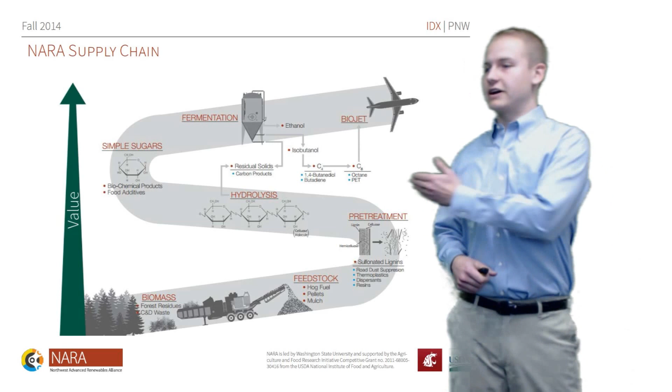However, it's not so easy to just go from biomass to jet fuel. There's this path that we have to take and go along it. And while this may look linear, there's a few different options along the way that the IDX team has been looking at. Right here, we're going to see the different options.

Option one is an integrated biorefinery, where all those processes you just saw on the last slide will be done at one central location. However, the IDX team is also considering a depot facility plan, where the preliminary steps would be done and then the feedstock would be shipped off for conversion to finally be turned into jet fuel. Both of these will be looked at.

To look at both of these, we divided ourselves into two teams. I'm now going to pass it over to my peers to talk a little more about the different teams and the different types of sites we are looking at.

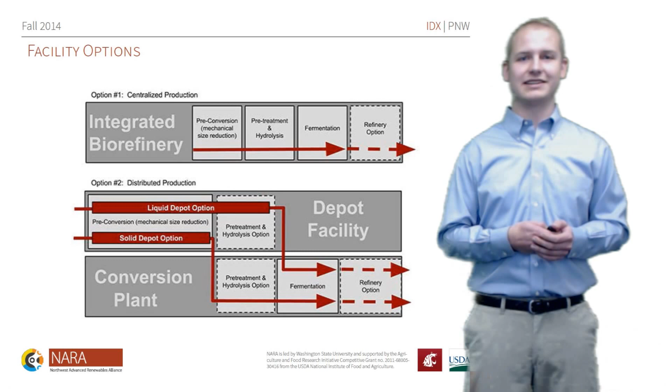Hi, my name is Ian Smith. To start it off, we're going to start with naming the members of the depot team. With that is Matt Jarrett, who just spoke recently, Stephen Keith, Cody Lane, and Ian Smith with myself. We're all students at Washington State University studying civil engineering. Brian Hansen is also on the team; he studies at University of Idaho and is studying bioenergy engineering.

The depot team is part of two facilities, which is the solids depot and the liquids depot. The conversion team covers two different facilities: the conversion facility and the integrated biorefinery. On this team is Sydney Diekman, Kyle Stevens, Christian Williams, and Anna Martin, and they're all students here at Washington State University studying civil engineering as well.

Now here is the depot team analysis. We have two different facilities, the solids depot and the liquid depot, and it focuses on the first half of the supply chain. For the solids depot, it is strictly the mechanical pre-conversion, which is the mechanical reduction in particle size of the biomass. So you have the biomass, and then you change that into the feedstock, which is wood chips or pellets, depending on what process you decide to take.

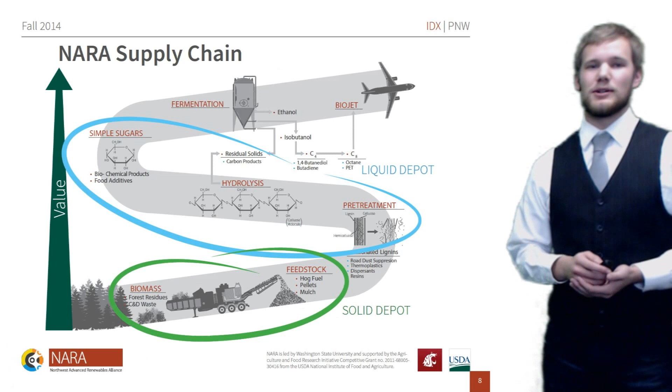The liquids depot takes that one step further: it has the mechanical pre-conversion, and then the liquid pretreatment, which is the mild bisulfite. This gets it ready for enzymatic hydrolysis, which then takes the sugars out of the biomass and sends that on to the conversion facility. There's a couple of things that make the depot methodology a little bit different.

The depot is multiple facilities of the same type, all smaller in scale. NARA has done an analysis taking an intake of 770,000 bone-dry tons a year and converting that into biojet fuel. A solids depot methodology would consist of 3 or 4 solids depots close to the biomass residuals, all working at a processing rate of 250,000 bone-dry tons per year.

And this cuts down costs on transportation of that biomass. If you have to transport that biomass far away and then mechanically reduce the size, then that cost of transportation is rather high.

The liquids depot is fairly similar, but there will only be about 2 of them working at a higher rate than a solids depot. This is because the increase in infrastructure due to the pretreatment and the enzymatic hydrolysis. So there'll be increased storage and increased type of equipment, such as a bioreactor or a reactor for the pretreatment.

And so I'm going to pass this on to the conversion methodology, and that'll be Anna Martin introducing that.

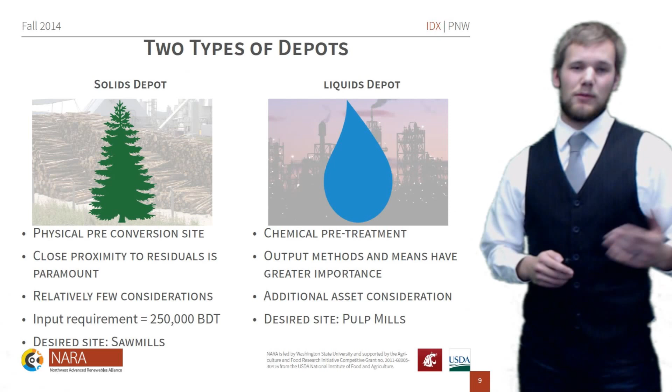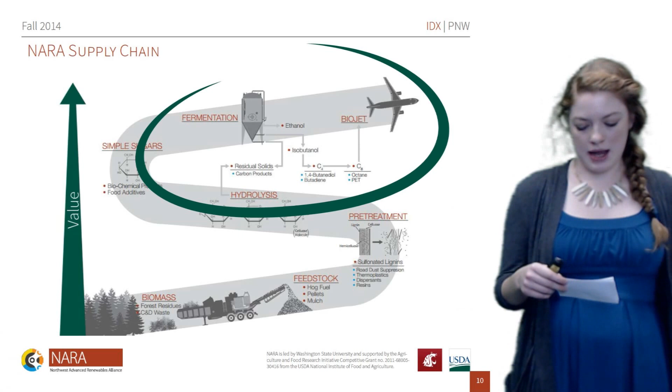Okay, so this is the NARA supply chain once again. It starts off for the conversion process by receiving the simple sugars and fermenting them to create the isobutanol. This isobutanol is then refined into kerosene. The kerosene is then blended with petroleum to create the final product of jet fuel.

So there's 2 types of facilities that the conversion process looked at. The first one, the conversion facility, will change based on what kind of depot is selected in the first part of the process. If a liquids depot is chosen, it will include fermenting and refining. If a solids depot is chosen, it will also add in an extra element of hydrolysis.

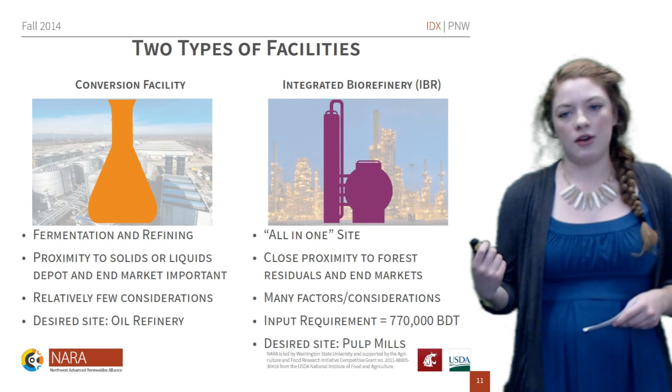The most important part for the conversion facility is that you have close proximity to the solids or liquids depot and to the end market. Relatively few considerations were put into selecting a conversion facility compared to an integrated biorefinery or some of our other sites that we looked at. The most desired factor in a conversion facility site ended up being an oil refinery.

The next type of site we looked at was the integrated biorefinery, and this was kind of an all-in-one site. So it takes the woody biomass all the way to biojet fuel. The most important factor for this ended up being close proximity to forest residuals and the end market.

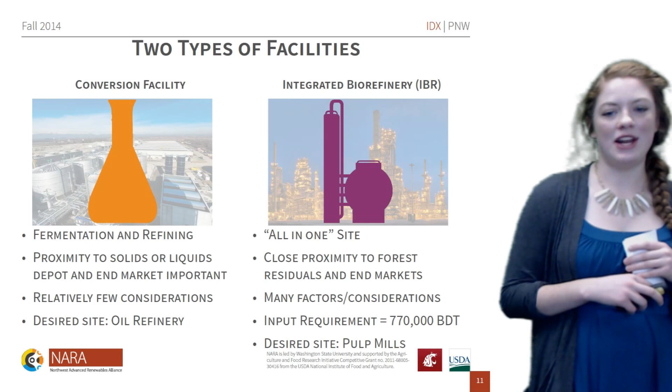In an integrated biorefinery, there were a lot of different factors and many different considerations that went into this. An input requirement to make this work was 770,000 bone-dry tons. The highest desired sites ended up having pulp mills.

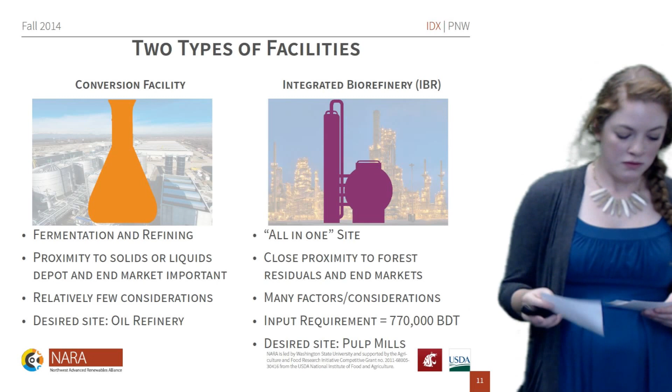So, according to the techno-economic analysis, or TEA, these are kind of the costs that we would expect for an IBR facility. This is about 55% capital expenditures and about 45% operational expenditures. Right now, the price of petroleum jet fuel is about 2 to 3 times less than our biojet fuel.

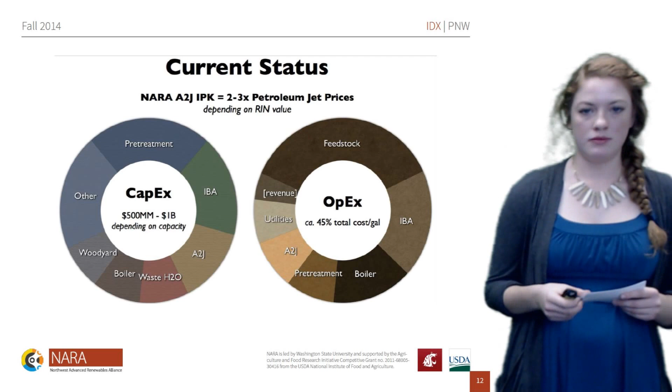Okay, so in order to start picking our sites, we had a preliminary site selection process. We started by considering what factors we considered important to us, and we listed and identified these factors and compared them to what communities had and what we thought was important within those communities. We basically matched up our needs and desires to the resources available within a community.

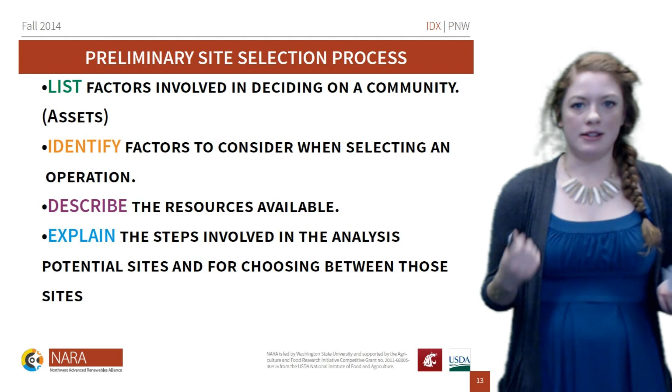We very broadly decided on why these sites were desirable, and I'm going to turn it over to Brian, and he's going to explain more of how we decided on the future sites.

Hi, I'm Brian Hansen, and this is a representation of our methodology of how we decided to pick our sites. We tried to go with a nice visual by using our GIS data and by giving each one of the counties a factor between -5 and +5, where the darkest colors are going to have the most positive value.

We then overlaid these, stacking them up and gave them an opacity filter based on how critical we determined each factor to be. While biomass was very important in many of the earlier processes, this was one of the heaviest factors.

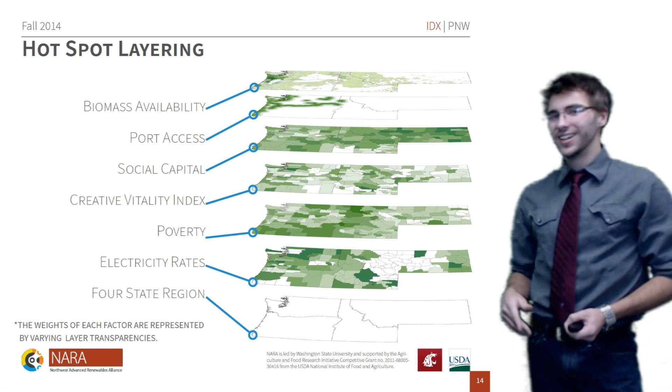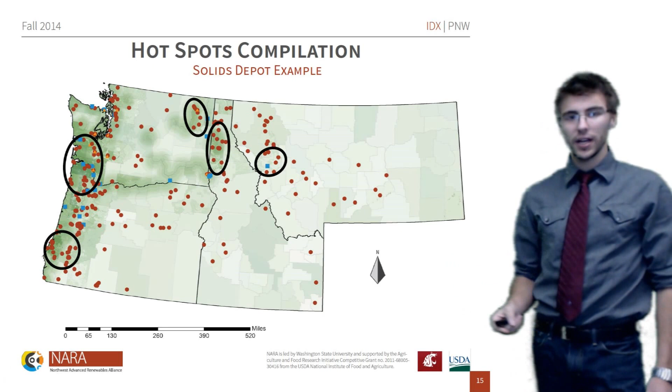And so when we look at the final site selections, we can see there are several hotspots out here, and we decided to circle those and look a little bit more intensely at those sites. By doing this, we took this broad scope that we had and broke it down to the individual sites in these locations to determine which ones would be the best. Kyle's going to show a little bit more about how we went along that process and did more in-depth discovery.

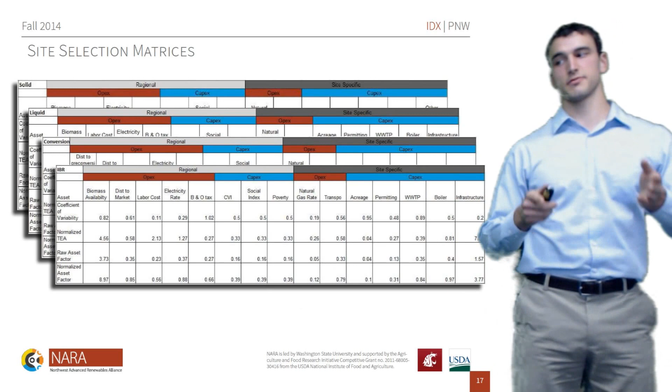All right, so I'll be walking you guys through how we use this site-specific information in our analysis. You can see that we created 4 different site selection matrices to help us out.

One was for each of the 4 facilities: solids, liquids, conversion, and IBR. This is an example of the site selection matrix we use for the IBR. You can see we have all of our asset factors listed, which are all the assets we took into consideration for our analysis. But we had to determine which of these asset factors are actually more critical for our ranking analysis.

To do that, we relied on the coefficient of variability, which is a measure of how variable the data is for each of these factors. Our methodology was: if it doesn't vary a whole lot, say for labor, for any of our sites, then it should have a smaller impact on the overall ranking of that site.

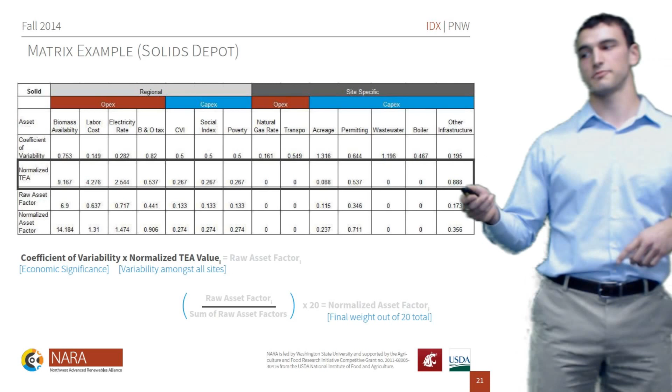We then multiplied that by the normalized value, which we developed with a lot of help from Natalie Martinkus, and made it in accordance to our asset factors. This is basically just a measure of how important this asset factor is to our overall project.

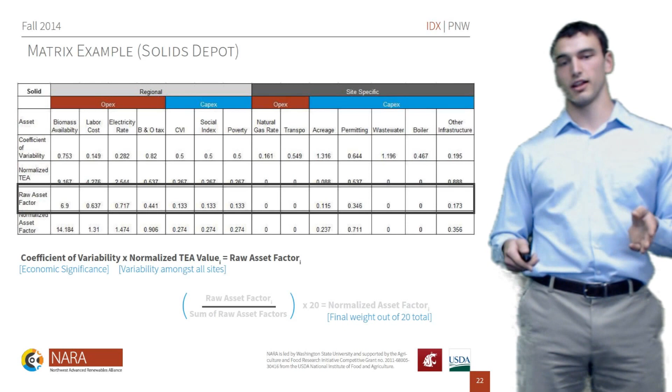The multiplication of these two gave us our raw asset factor, which was then normalized and set to 20 for our analysis. The reason we set it to 20 was because each of our asset factors is evaluated on a rank from -5 to 5. So when all these are accumulated and multiplied by this normalized asset factor, it gives each of our sites a maximum score of 100, which was just easier for us to use.

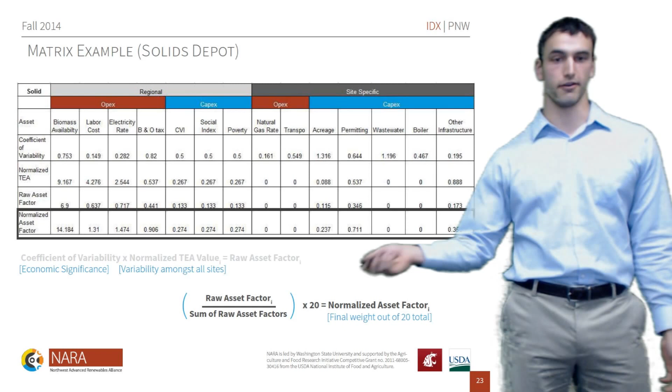Next up will be Steve and Keith talking to you about a few of these asset factors.

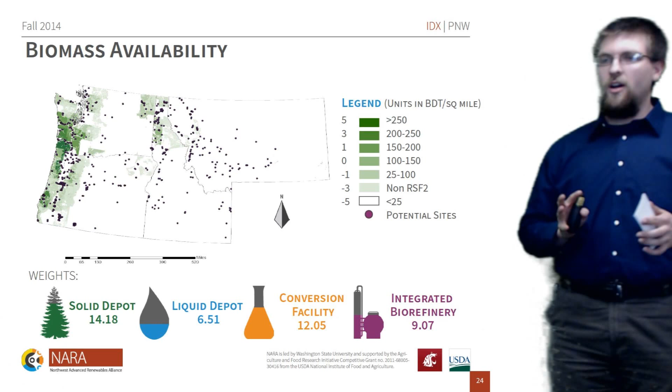Hello, I'm here to talk about biomass availability first. We had about 600 potential sites overall to look at, so the analysis was broad, a hotspot analysis. We're trying to limit the sites to actually hone in on the site-specific factors to look into.

We did this starting with biomass availability, one of our largest factors, using a biomass availability density plot given to us, and researched a break-even distance of about 28 miles, plotted that as a buffer around each site, and then got the actual volume of biomass availability around each site.

We had approximately 70 sites that provided a biomass availability of over 250,000 bone dry tons, and we varied linearly from that low value to our average high to rank each site and get our top 40.

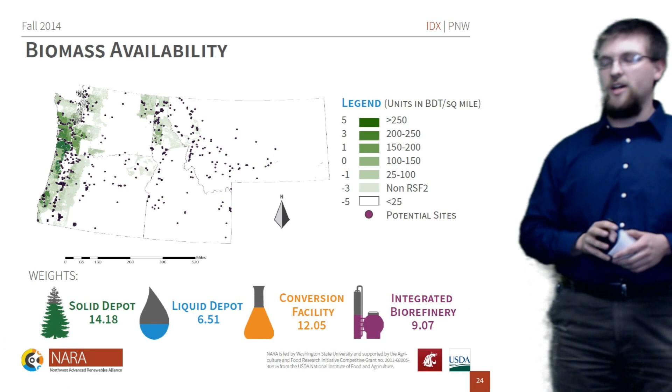Next, we looked at our electric rates. We found the electric rates from the Energy Information Administration. We also ranked this linearly from the average high value to average low value, obviously wanting a lower electric rate to minimize operational costs.

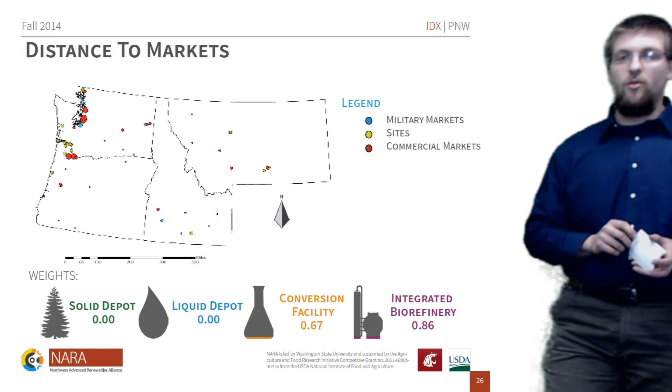Social capital is what the community has to offer so that people who are employed there are happy and want to stick with the project. This is a measurement of things like voter census and other assets the community has, such as bowling alleys, golfing facilities, and much more. Poverty is somewhat self-explanatory.

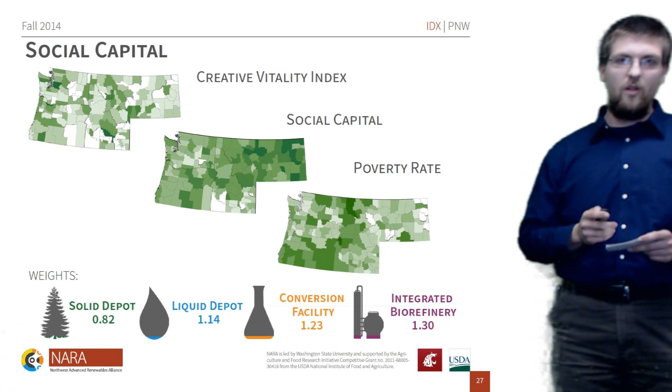And lastly, labor rates, which we found from the Bureau of Economic Analysis. We wanted to choose a location with a lower average annual salary so that, in theory, you can offer a salary higher than the lower average to gain more incentive, lowering operational costs but also improving the average economy in the location. Next up is Sydney Diekman to talk more about facility type scores.

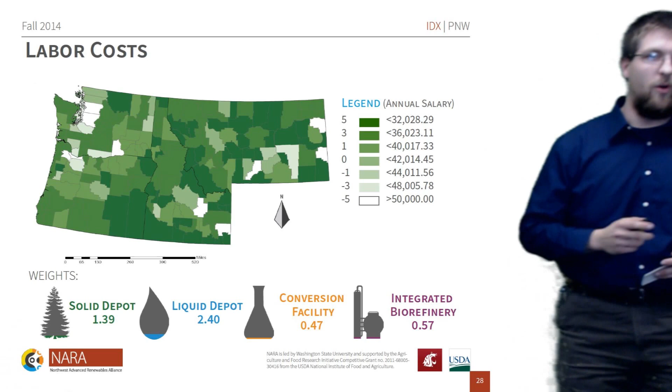One factor that needs to be considered when choosing a site is what type of facility is already present. When looking to build an integrated biorefinery, for example, there is a capital infrastructure cost of about $726 million, so you want to maximize savings by picking the most appropriate site.

So on a site-by-site basis, we looked up whether an ethanol plant, a chipping mill, etc. was present, and then looked further into what types of infrastructure they already have in place. You could assume a sulfite mill would have nothing in place for enzymatic hydrolysis, but everything needed for pretreatment.

We assumed that was how much money was being saved by choosing that type of mill. For example, for an integrated biorefinery, a sulfite mill would save approximately $510 million out of a total of $726 million, which was 70% of the costs. This was the most saved out of all the types of pre-existing facilities, so it was given a perfect score of 5.

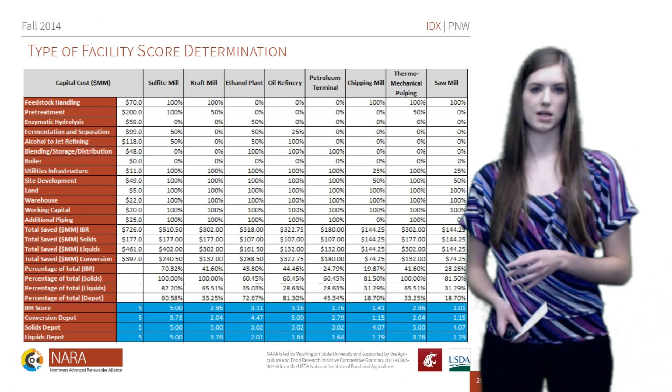The other types of facilities were rated according to that. So if a type of mill saved 35% of the cost compared to the 70% by a sulfite mill, which is the best you can do, you'd give it a score of 2.5 out of that perfect 5. We applied this logic to all types of mills and the different types of depots being considered, such as conversion, solids, liquids, and IBRs, shown in the blue section of the table at the bottom. Those are the scores from 0 to 5 given for each type of facility.

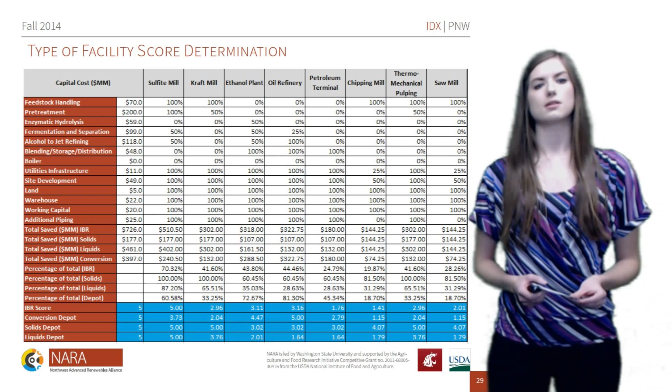Then we looked at the site-specific weights for this infrastructure. Infrastructure is more important to an integrated biorefinery than it is for a solids depot. A solids depot doesn't use as much expensive equipment compared to an integrated biorefinery, which contains the entire process from start to finish. There's a lot of infrastructure needed there, and it's very expensive, so it's more important when choosing an integrated biorefinery to pick an appropriate site to save those costs compared to other types of sites.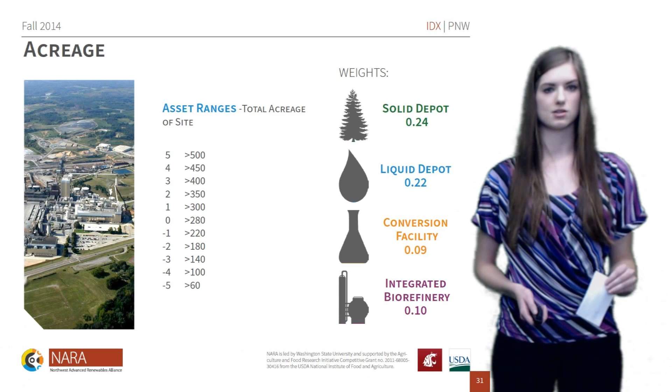Another factor we considered was acreage. This was again weighted higher for certain types of facilities than others. It was more important for a solids depot than for an integrated biorefinery or a conversion facility, because the solids depot needed more acreage to store the physical slash and woody biomass in order to break it down. The acreage range was on a scale of -5 to 5, with more acreage being better and less acreage being less desirable. We determined through the tax assessor's parcel data how much acreage was present at each site.

Then we considered natural gas rates. The cheaper the natural gas, the better, of course. This was also determined on a site-by-site basis — we would look at a site, see what county it was located in, and what natural gas rates were offered there. You can see it gets a 0 weight for solids depot since no natural gas is needed for any of those processes, but it's relatively higher for liquids depot because there is some natural gas needed there.

And up next is Christian to continue talking about site-specific assets.

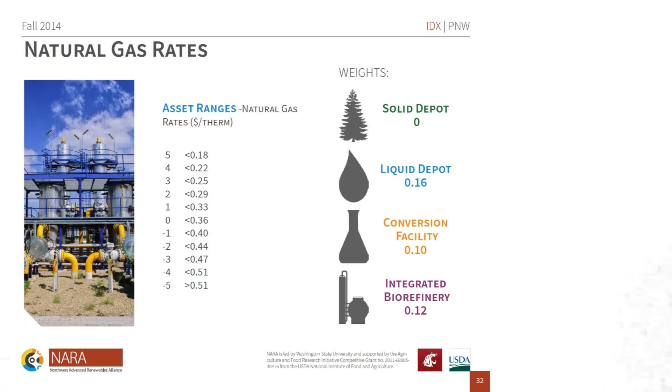To continue from where Sydney left off, the next asset we looked at includes wastewater permits, air quality permits, and hazardous waste permits. It's important for the facilities we're looking at to have these types of permits so they can handle the operations and processes we're looking to utilize for our supply chain. So we went to the Department of Ecology's website for each state and looked for these types of permits by searching the facility name, and developed a scoring system based on what we found.

If the facility had all 3 permits, it was given a score of 5. If they had just 2, it was given a score of 2. If they had just 1, it was given a score of -2. And if they had no permits at all, it was -5.

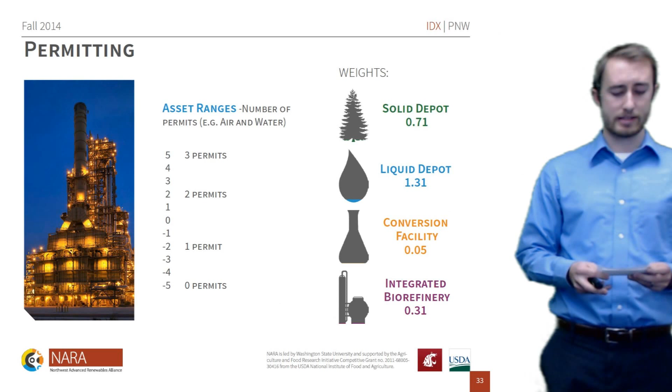And so the next factor that we looked at was B&O tax rates — this is building and operations tax rates.

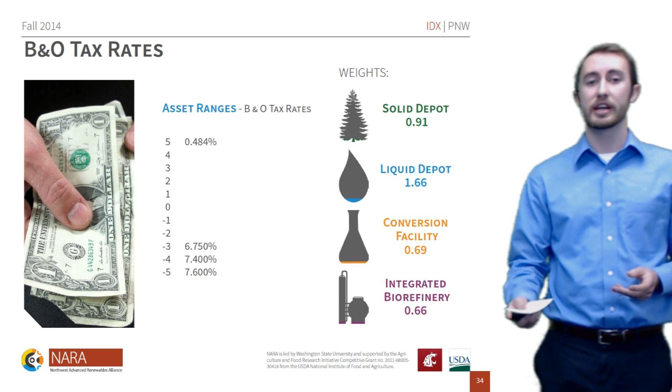Sites are taxed each year based on their assets, the buildings, as well as the operations at these facilities. So what we did was we looked at the lowest tax rate for our sites and scored that a 5, and went down from there.

The next factor we looked at is boilers. Boilers are important for our processes to generate power for conversion and refining especially. We looked at whether these facilities had boilers on site currently or if they would need to build one. If the facility had a boiler presently, we looked at the capacity of these boilers. If a boiler was determined to have a capacity to generate power of 100 megawatts or greater, it was given a score of 5, and down from there.

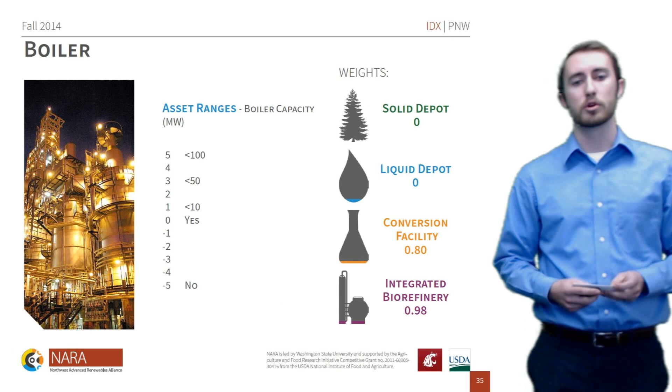Some of the facilities we looked at, we were able to determine that they did indeed have a boiler, but we were not able to find the capacity for these boilers at all. So we gave these facilities a score of 0 so it would not negatively impact their overall score. And if the site did not have a boiler at all, it was given a score of -5.

The next asset we looked at was whether or not a site had a wastewater treatment plant readily available. Wastewater treatment is very important for the processes we're looking to use because there are a lot of chemicals involved. It's also important for these processes to comply with regulations set by the EPA as well as the Department of Ecology. So we looked at whether or not wastewater treatment was available at these facilities - if it was, given a score of 5, and if not, a score of -5.

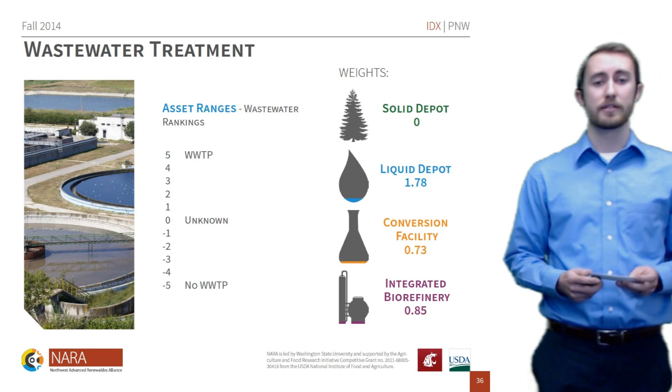The last factor we looked at was transportation on site, which is important for shipping to markets as well as shipping between different facilities and depots if we choose to go with that method. We looked at rail and port access on site. If they had both available, they were given a score of 5. If they had one of these options available on site, the facility was given a score of 0, and if they had none of these on site, it was given a score of -5.

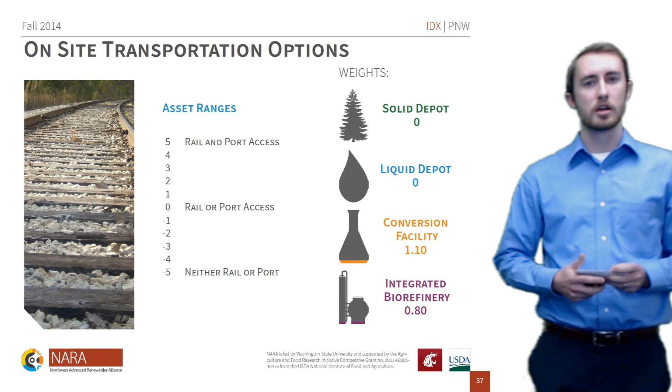Next up, Cody is going to discuss with you some of the top sites we found in the Pacific Northwest.

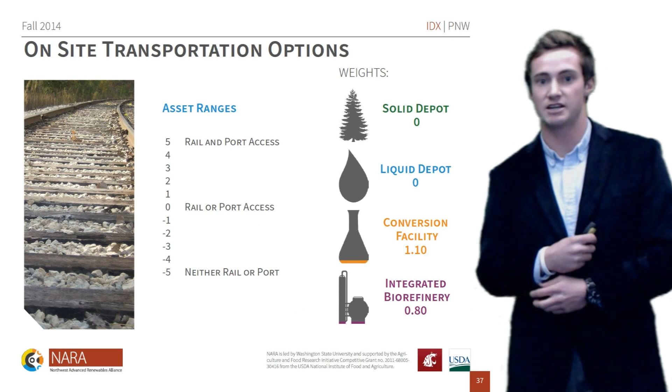From all these asset factors that were just discussed, we were able to get top sites for each kind of facility type there is - the liquid depot, the solids depot, the conversion facility, and the integrated biorefinery. Everything displayed is the site's name, the location, the score received, and the rank.

I'd like you guys to take note that even though a site may have received a higher score as a liquids depot, that doesn't mean that's what we're examining versus a solids depot. Each kind has its trade-offs, and that's just the score received based on the factors we've described. For example, there are trade-offs with the solids depot - you can have more solids depots in an area because it requires less infrastructure and can take in biomass, whereas a liquids depot requires more infrastructure and can produce a more energy dense material, therefore it requires fewer liquid depots in that area.

We also tried to get to a top 5 for each type of facility, but we'd like you to notice there's a 6th for the solids depot and the integrated biorefinery. That's because when we were trying to narrow them down, some of the sites had such a close score that we thought it wasn't fair to leave those off, and that it still should be examined as a location we're looking at.

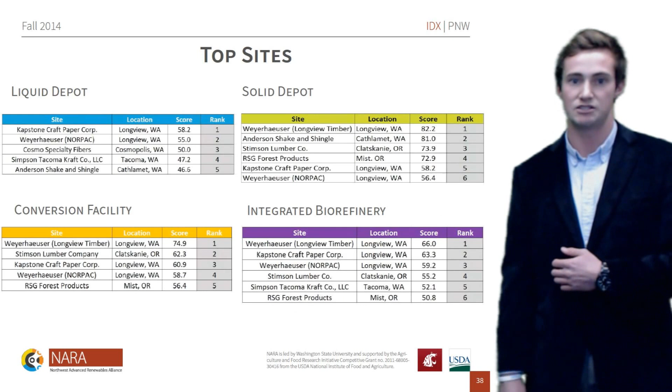When looking at these sites, you can see on this map that's about to be displayed that in the Northwest region, they're in the Oregon, Longview, and Washington area - the Longview area being in Washington - and you can see where the facilities fall within.

The triangle displays a solids depot, the circle displays a liquid depot, and the square is an integrated biorefinery, which falls within a little varied locations.

When you look at this map, the conversion facility isn't shown because there's a lot of overlap. There's really 20 sites displayed, but because of overlap only 8 sites are shown, and each site got its symbol based on the highest score it received in the previous slide. So if it got its highest score as a liquids depot, it was displayed as a liquids depot versus a solids depot. That's why only 8 are shown here, but in the region you see some fall in the Longview area and shoot up into the Washington area as well.

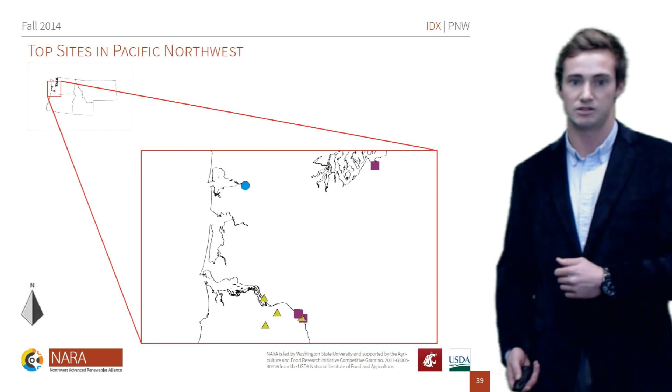So with that, our next steps are doing a sensitivity analysis, and from there we can gather more site-specific information and look into the companies, like property taxes and other things that can narrow down but also broaden the gap from one site to another.

In our previous presentation, it was mentioned to look into Native American tribal lands, and we're going to continue to examine that as a possible solution for where we could put a site, or where sites may have tax trade-offs. From there we can narrow our site selection to our best suited locations.